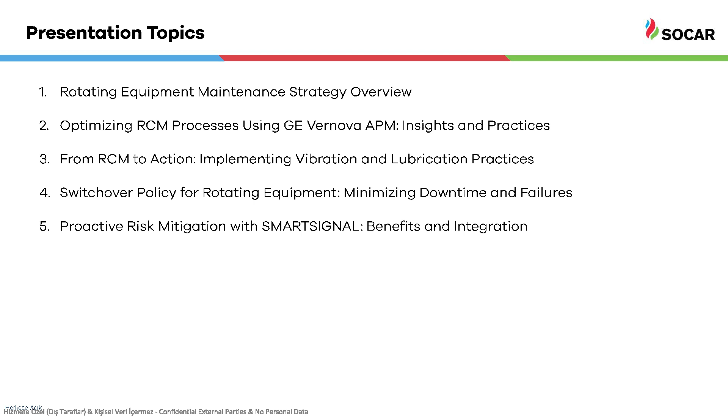So we are servicing around 4,000 rotating equipments in our refinery and petrochemical complex. And we are dealing with several challenges and have some KPIs to monitor our performance. You can see some of them here. We have several types of rotating equipment installed in our facilities, especially in polymeric plants. And also, to optimize the workforce necessity, we have a different strategy for turnaround in the petrochemical plant and refinery.

The cycles are every 5 years, but because we optimize the durations, every 2.5 years we perform a major turnaround, one in petrochemical, one in refinery. The last one was October 2024 in the refinery, which was the first turnaround after commissioning. And we performed major overhauls on all major rotating equipment with a flawless startup. We are also dealing with budget planning, availability of the equipment, backlog management, and mean time between failures for pumps.

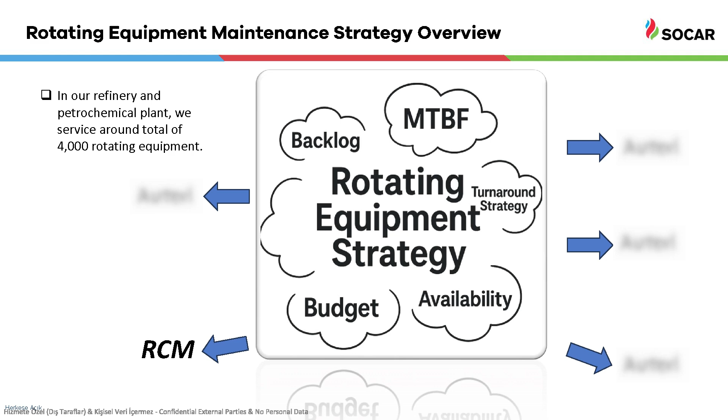And RCM, reliability centered maintenance, is one of our strategic tools to optimize our effort and get acceptable reliability levels. So here you can see a brief visualization of RCM. First of all, you should do your study for identification of equipment criticality levels. When you identify equipment criticality levels, you can decide the care level of your equipment. It should be cost effective, and you should identify your failure modes.

Because RCM studies are time-consuming activities and include participants from several disciplines, the experience levels of the participants may affect the result of the study. That's why we try to make it standard just to identify the care levels. Let's say basic care, standard care, and optimized care, which enables us to be cost-effective, not over-maintained, but at the same time have a desirable level of reliability. And the outcomes of RCM are corrective maintenance, preventive maintenance, and predictive maintenance.

We will go into details for predictive maintenance, but before going further, I have to briefly explain corrective maintenance. Even if you perform studies and implement newer technologies, it is inevitable to have some breakdown maintenance on site. So we still have breakdown maintenance. And also, according to the criticality level of our equipment, it is an option to select run to failure. So we still have corrective maintenance here. And we also have time-based preventive maintenance activities.

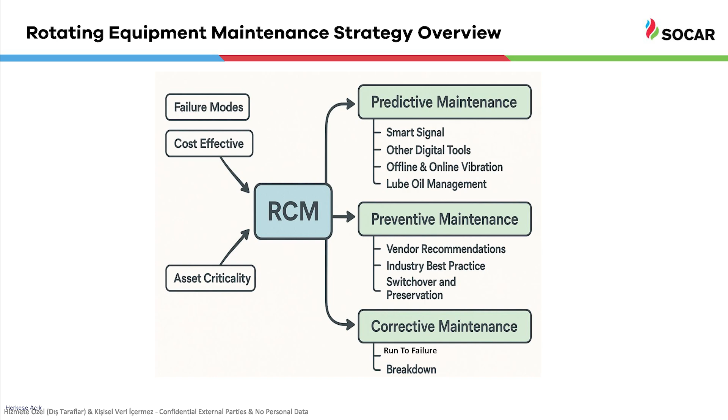We are using SAP. And then they, together with rotating equipment maintenance people, identify which kind of site activity should be put into SAP to cover the recommendation and eliminate the risk. Not completely, but reduce the probability of that failure on site. So, as a result of the RCM study, we put some barriers and we achieve some actionable items on SAP, and the site maintenance team executes on site and prepares reports, putting the details in SAP.

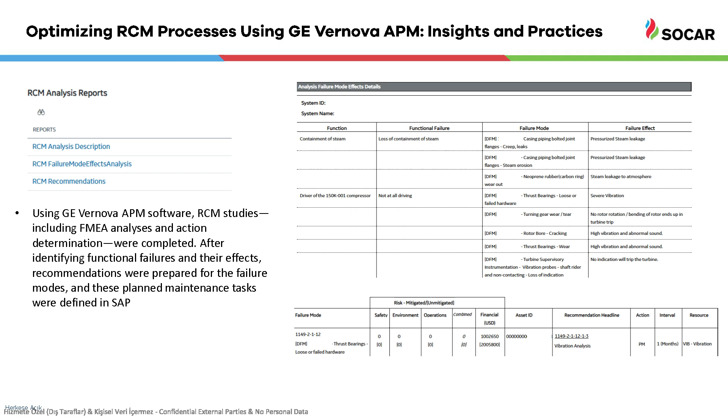So together with SAP and APM, we have a lot of data for future use, let's say, to identify which equipment should be maintained during turnaround or which activity should be done to prevent unplanned shutdown. Here is the end of my section, and I hand it over to my colleague.

Yes, I will deep dive into our topic. Let me begin with our vibration practice in SOCAR. We have two major practices for vibration: one of them is offline vibration measurement and the other is online vibration measurement. For offline vibration measurement, we have 10 portable devices in the field, and we collect our data from the field manually. Our technician team goes into the field and takes all measurements on a monthly basis. We have monthly rounds for that measurement.

We have 2,870 measured equipment in the field, and of course we have much more equipment in the field, approximately 4,000. That means our measurement points come from criticalities and RCMs, and we have 27 locations at the peninsula. In 2024, we completed 18,260 measurements in one year. From those measurements, we opened 406 notifications, and according to those notifications,

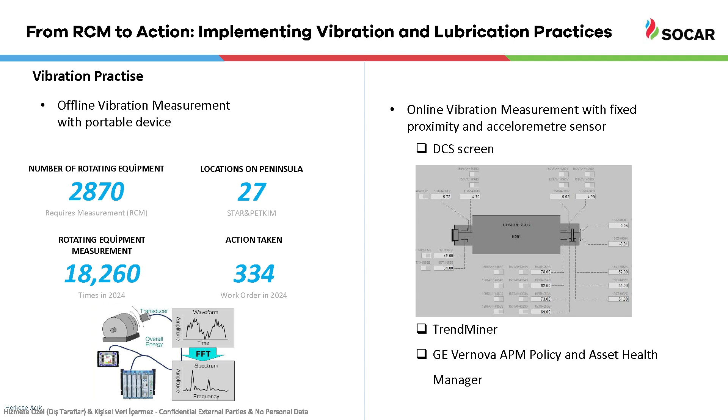Moving on, the next item is oil management practice. Our lubrication tasks are divided into two main categories: preventive and predictive actions. For preventive actions, our lubrication teams have daily rounds. Our team goes into the field daily and checks all oil levels and oil condition. If they detect any problem, they open a notification and change the oil, or they send a sample to our laboratory for full analysis. In 2024, we completed 83,585 rounds in the field. We also had a turnaround in Star Refinery, and we completed full flushing of 9 equipment oil skids. It's a very huge job for our team in a short range of time.

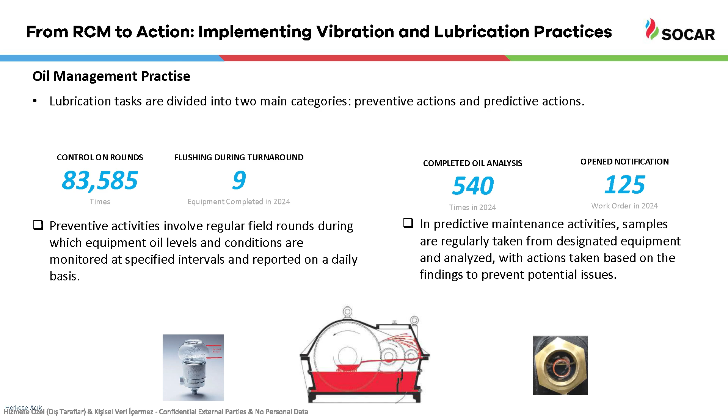On the predictive side of our lubrication practice, samples are regularly taken from the designated equipment and analyzed. In 2024, we completed 540 oil analyses. From that analysis, we opened 125 notifications. That means our team prevented 125 possible failures in the field.

I have to add one point here. Lube oil management is an underestimated activity in industry. But I can assure you, we found things in bearing housings which are not oil. There is a dedicated team for lube oil management in our facility, just to ensure that good condition oil exists in the equipment. In this slide, I can explain how we use the policy in the field.

Before that policy, our technician team did that job in their rounds. Right now, that means we transformed our preventive activities to predictive activities with that policy, actually. So it's a very useful policy for our technician team.

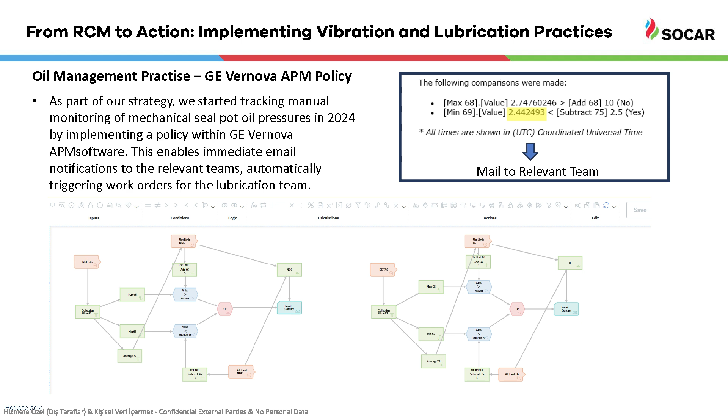And let me explain the switchover policy for rotating equipment. We have a policy about it in different software, and the primary objective of the switchover policy is to ensure the reliability of the equipment. As you know, prolonged downtime of the equipment results in damage to the mechanism of the equipment. So we wanted to create a system to collect the data, and if the equipment doesn't stop or run according to its program, that system notifies us with a mail.

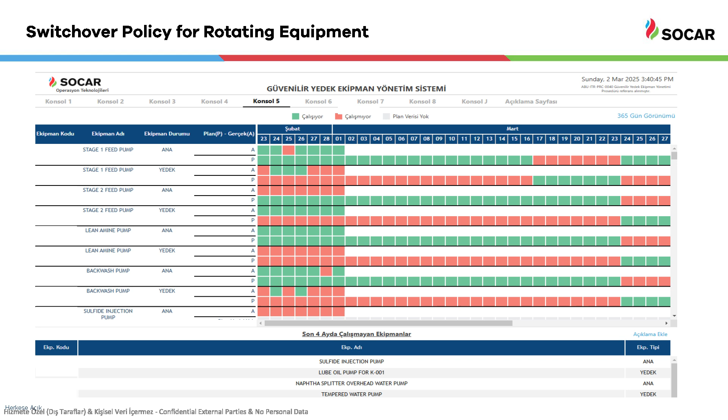In addition to this system, as I mentioned before, we have a monthly vibration tour, and we create a report on a monthly basis and send it to our related team. And as you know, if we cannot take a measurement from the field, we highlight it in red in our report. After that, our technician goes into that policy and opens an instance about that equipment.

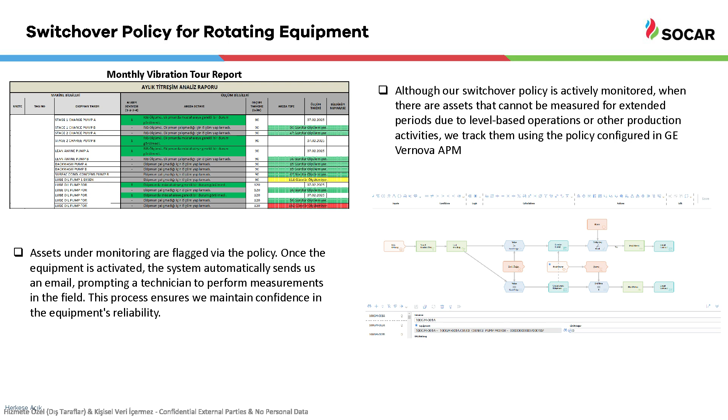After that, the policy tracks our data online, and if the equipment runs or stops, the policy sends a mail to our technician team, and our technician team goes into the field and takes a measurement with that policy. So we ensure the switchover policy with the APM software policy.

I also add one point here: maintenance people can understand, sometimes operators start to blame that both equipments failed at the same time. But we have redundancy, it shouldn't be. When we checked the condition of the equipment before we implemented such software and kept tracking the conditions, we found that one was running for years, months, while the other one stood still for a long period of time, and it was not functional because of standing still too long. Now we are following it by using this software just to ensure we don't have an emergent work order.

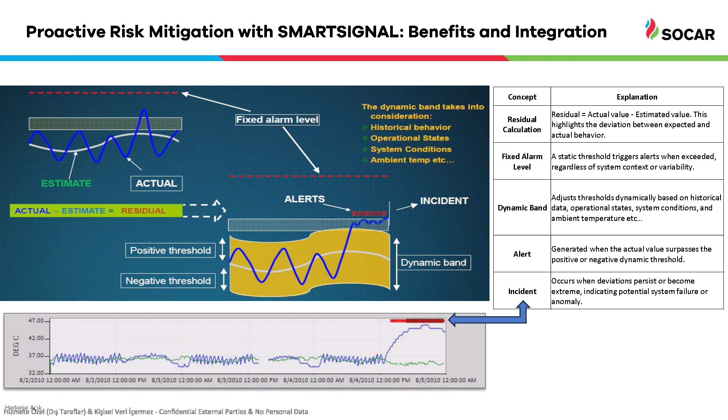Another factor that I would like to cover is SmartSignal and its relationship with our rotating equipment strategy. Actually, you have a lot of knowledge about how SmartSignal works. In 3 days, we had a lot of sessions about it. So, in summary, we get an advisory alarm, and after that advisory alarm, we have time for investigation with the system.

That is our SmartSignal progress at SOCAR. We started the POC in 2021. After the POC, we did some valuation meetings and created a report about the valuation. In that report, we had to decide how to calculate the value of the system. So we made an assumption about it, and we did some acceptance based on the risk in the FMEA.

So if the system mitigates our risk in the FMEA, we accept that as a valuable case. With this method, we calculated value, and after that, we decided to expand our project with 8 equipment, and in total, right now, we are using 13 equipment in SmartSignal.

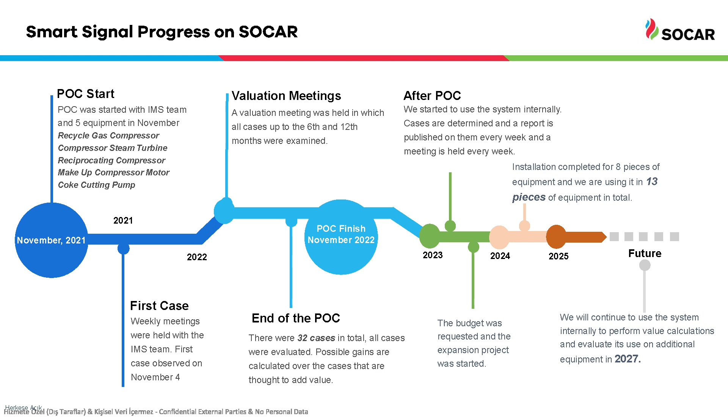And this is our 3 years summary, actually. We use SmartSignal on 13 equipments in 3 locations, and with the risk mitigation method, we calculate $1.4 million total possible earnings. That phrase possible earnings is very important here. And in the system, 1,665 alerts occurred. From those alerts, our team and the GE team evaluated the alarms and opened 89 cases. According to these cases, our team had 70 meetings in total over the 3 years.

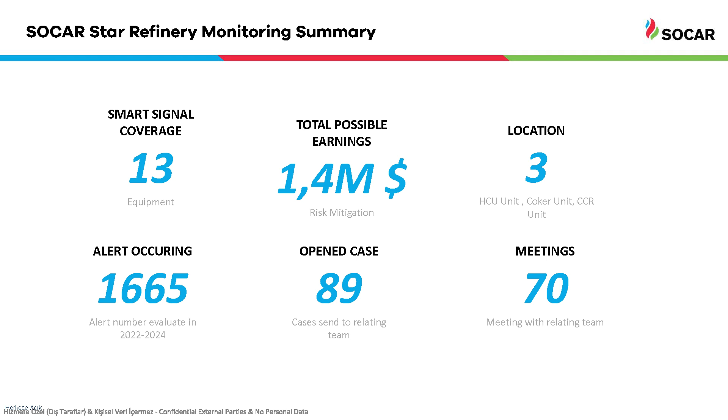And lastly in my presentation, I would like to show 3 examples about SmartSignal. The first case is about our screw compressor. Our advisory alarm said that our vibration level was high in that screw compressor. In that case, we saw that our vibration level was high, and our team, our engineer and technician team, went into the field and justified the value.

After that, our production team and engineers evaluated the issue, and we found our screw compressor capacity and our vibration level are correlated. When the capacity is low, our vibration level is high. So our production team made some adjustment to our capacity, and our value normalized.

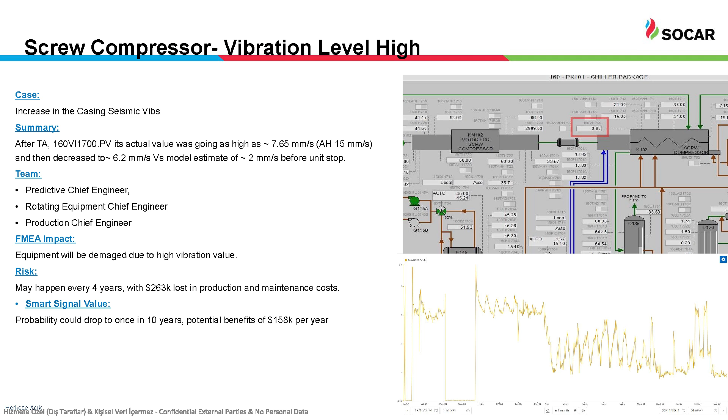The second example is about our centrifugal compressor cooling water system. That cooling water system has one temperature control valve. That control valve fluctuated after turnaround. You can see it here. And we found a calibration problem in the field, and our instrument team went into the field and took action about it, and after that our value normalized.

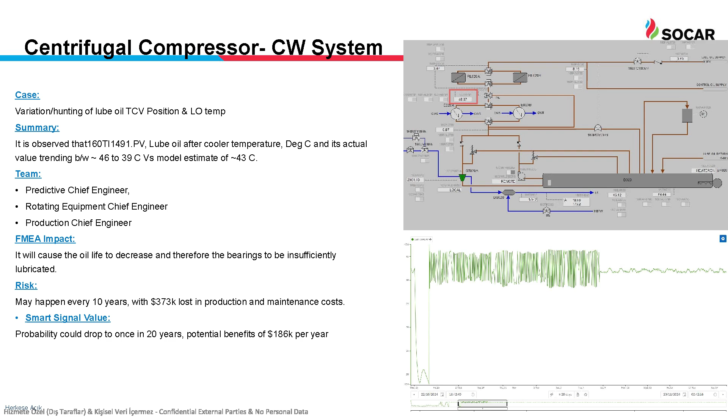Actually, it's a very basic case, but very effective, because we could not find that fluctuation without that system, because it is under our alarm limit.

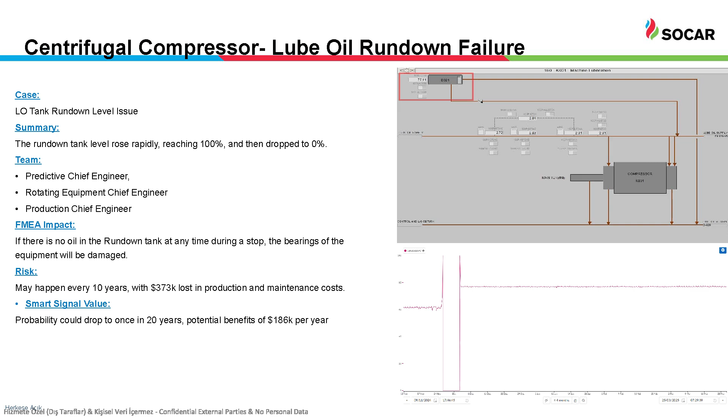And the last example is about our lube oil sensor. Our lube oil rundown tank sensor rapidly rose and reached 100%, then rapidly decreased and reached 0% before normalizing. We found a problem in the field, and our instrument team went into the field and checked the calibration, and yes, they found a calibration problem in the field. After the calibration, our value normalized again. And again, it's a good case for us because we could not find that fluctuation without SmartSignal.